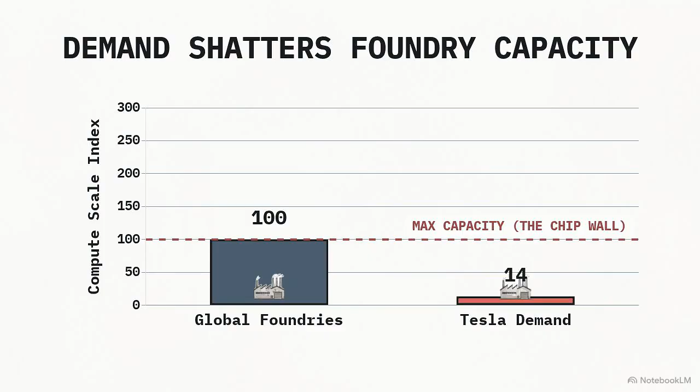Internal forecasting models revealed a strict physical limitation, known as the chip wall. This is a projected macroeconomic reality where the combined maximum output of the world's leading semiconductor foundries, primarily TSMC and Samsung, will be mathematically insufficient to meet Tesla's scaling requirements.

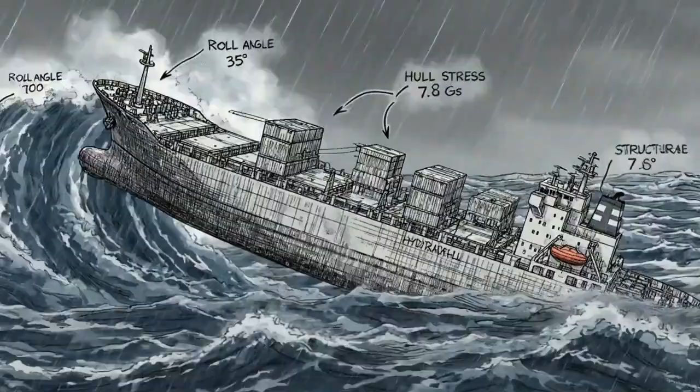Relying on those foundries also introduces severe geographic and geopolitical liabilities. Building the intelligence architecture for a massive fleet of autonomous vehicles and robots on a highly concentrated, fragile supply chain located entirely across the Pacific Ocean presents an unacceptable corporate risk.

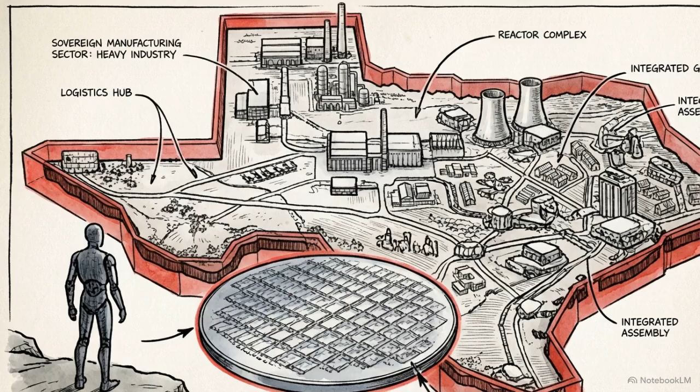To survive the AI race and secure its physical robotics rollout, Tesla concluded it must transition from a fabless automotive client into a sovereign integrated device manufacturer. By domesticating the hardest manufacturing process in human history, Tesla aims to design, fabricate, and package its own silicon entirely in-house. Tesla initially attempted to bypass the impending chip wall through a traditional partnership.

They signed a $16.5 billion supply contract with Samsung Electronics to manufacture the critical upcoming AI6 processor. Early in 2026, that strategy failed.

Samsung's highly anticipated 2-nanometer prototype run suffered a catastrophic schedule slip, delaying production by roughly 6 months. This acute delay rippled through Tesla's corporate roadmap, pushing the critical AI6 mass production deep into late 2027 or 2028. It exposed the existential threat of outsourcing hardware development for embodied AI.

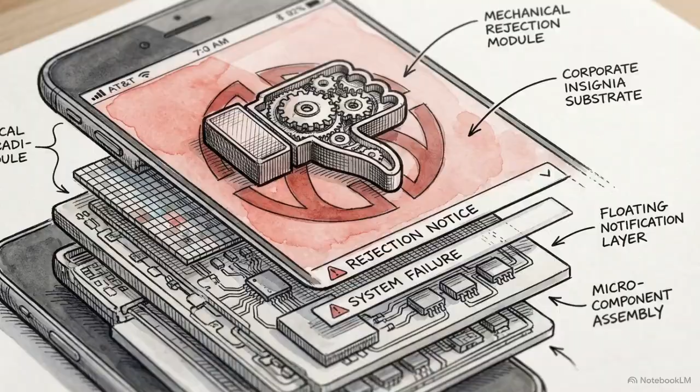Rather than accept the delay, Elon Musk made a ruthless pivot. He effectively fired his exclusive external partners and posted a 7-word announcement, declaring the launch of a domestic TeraFab initiative in exactly 7 days. Tesla is targeting an initial capacity of 100,000 WSPM, with a long-term goal of 1 million.

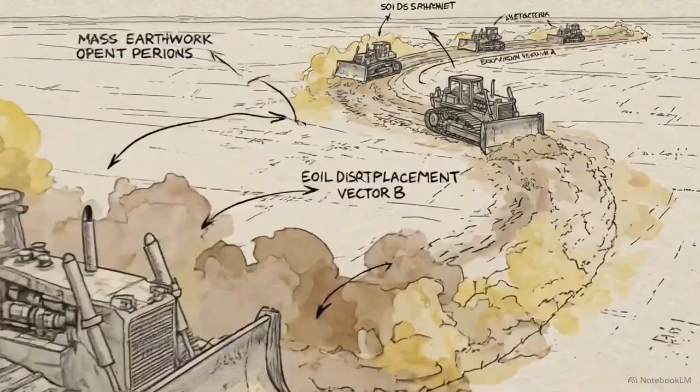WSPM stands for wafer starts per month, the standard metric for a factory's total output. Reaching 1 million WSPM would mean replicating roughly 70% of TSMC's total global output inside a single domestic footprint. Building an industrial empire of that magnitude within a single Texas footprint represents an aggressive, high-risk declaration of total silicon independence.

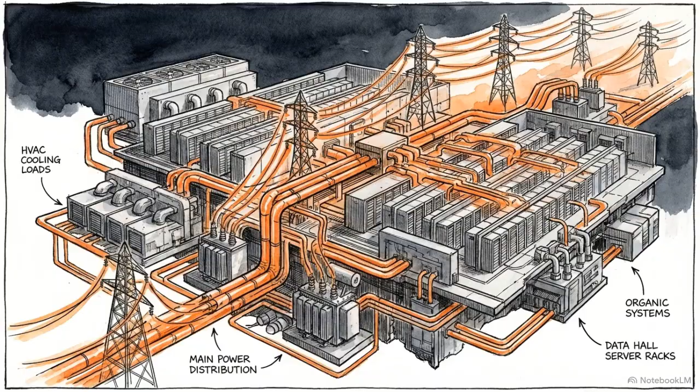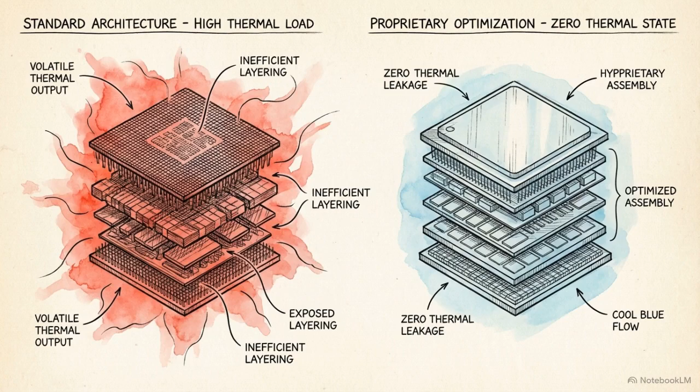The global build-out of AI infrastructure is severely constrained by raw electrical grid capacity. An NVIDIA H100 processor famously draws up to 700 watts of power. Tesla designed its custom AI architectures to achieve equivalent computational performance at a hyper-optimized 150 watts.

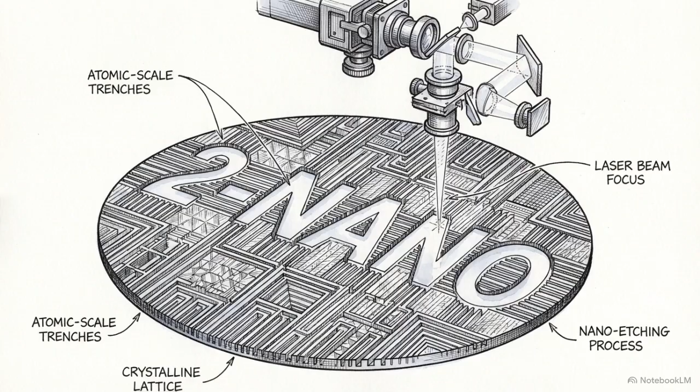Achieving that extreme 150-watt efficiency strictly dictates manufacturing at the bleeding-edge 2-nanometer process node. Traditional architectures fail at the 2-nanometer scale due to quantum tunneling. Electrical current leaks through solid matter, generating heat.

The 2-nanometer process solves this with a gate-all-around architecture. Wrapping the gate completely around the silicon channel locks electrons in place, preventing thermal leakage.

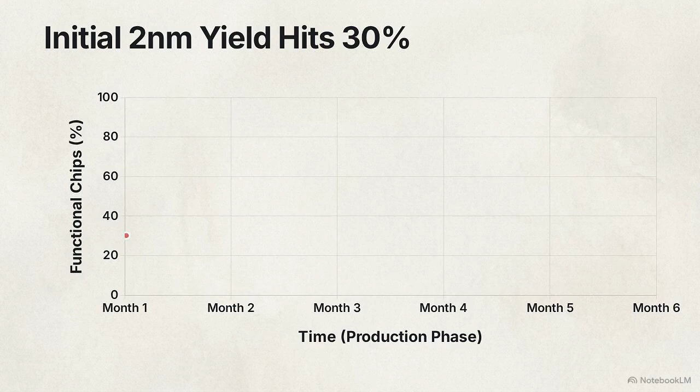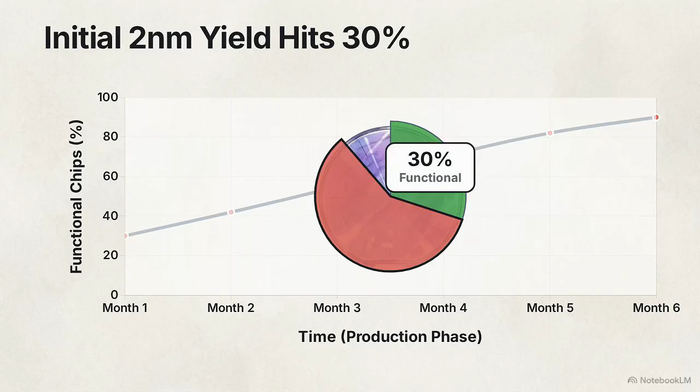Moving from nanometer physics to factory economics requires understanding yield curves. A yield curve measures the percentage of functional, usable chips produced on a single silicon wafer versus those scrapped due to microscopic defects. Early production runs at advanced nodes like GAA are notoriously volatile.

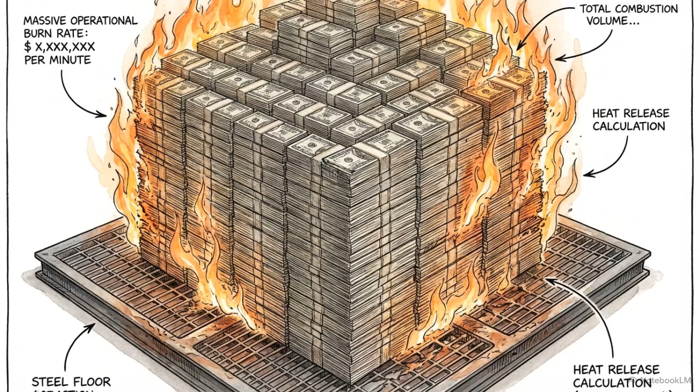Initial attempts frequently produce catastrophic yield rates, sometimes resulting as few as 30% usable dies per wafer. The true cost of the TeraFab is not the $25 billion construction budget, it is the tens of billions of dollars in operational cash burn required to agonizingly tune that 2-nanometer yield curve from 30% up to a profitable 90%.

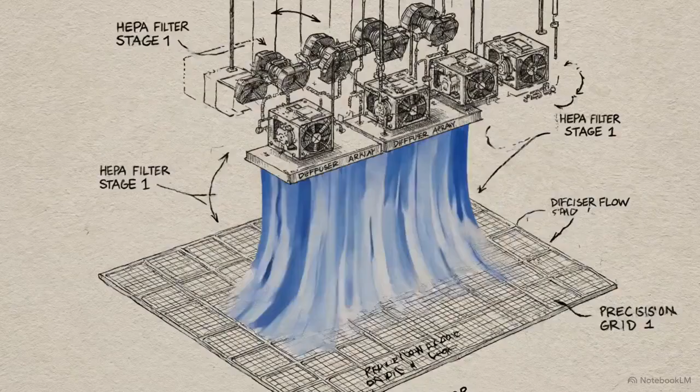For decades, the bedrock of semiconductor yield management has been the ISO Class 1 cleanroom. These massive, energy-intensive environments utilize heavy HVAC infrastructure to filter out almost every microscopic particle from the ambient factory air.

Musk polarized the industry by proposing to discard these traditional cleanrooms entirely. He publicly wagered that he could eat a cheeseburger and smoke a cigar directly on the 2-nanometer factory floor without ruining the silicon. His technical argument relies on wafer isolation theory.

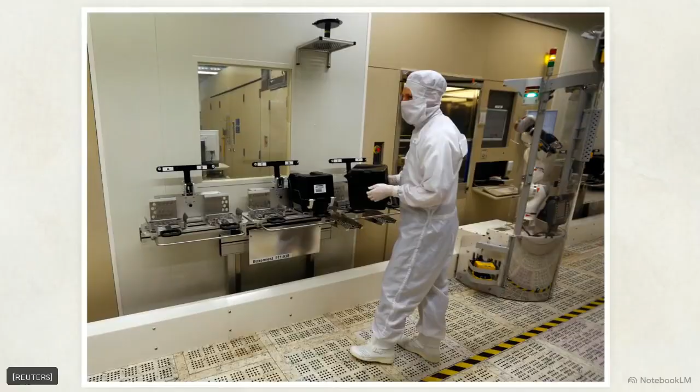He proposes keeping the product inside FOUPs, or front-opening unified pods, which are sealed boxes filled with pure nitrogen gas, conceptually identical to how agricultural commodities are protected in controlled oxygen-free atmospheres during global shipping.

Process engineers immediately identified the fatal engineering conflation in this theory. Successfully isolating the silicon wafer does absolutely nothing to protect the incredibly sensitive manufacturing equipment from the macro environment.

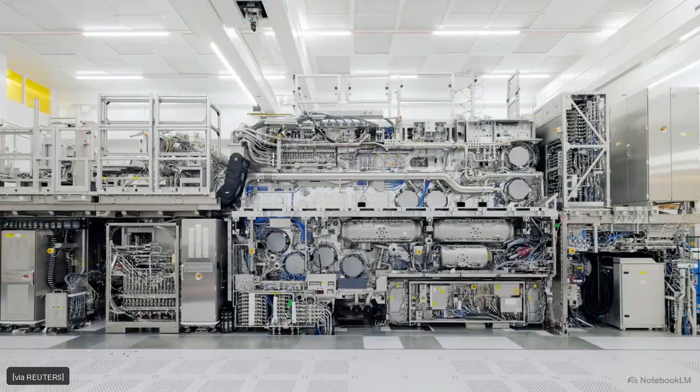Printing at 2 nanometers relies exclusively on EUV, or extreme ultraviolet lithography. This technology generates a 13.5 nanometer wavelength of light by bombarding microscopic tin droplets with high-power lasers tens of thousands of times per second inside a vacuum. To direct that specific wavelength of light onto the silicon, EUV technology utilizes ultra-sensitive optical mirrors.

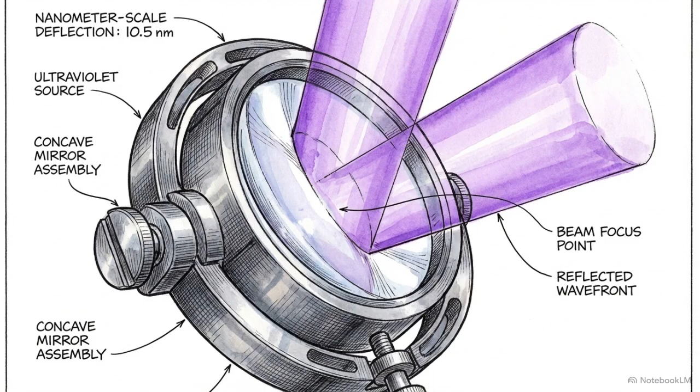Cheeseburger grease and cigar smoke generate massive amounts of volatile organic compounds. Even if the wafer is safe inside its nitrogen box, the ambient factory air will inevitably interact with the lithography optics during routine machine maintenance or reticle loading.

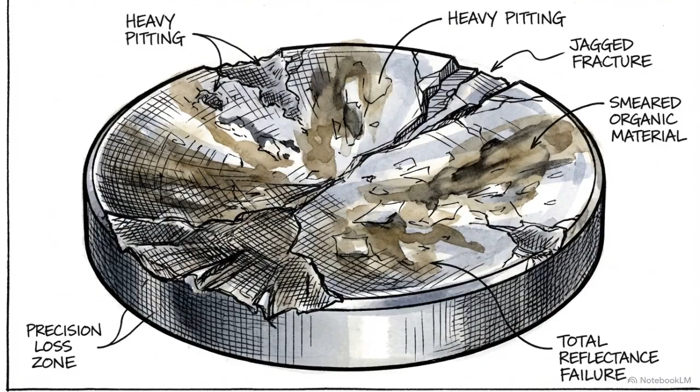Contaminating a $200 million optical mirror with these compounds permanently destroys the tool's precision. If the mirror cannot focus the light perfectly, the factory's production yield drops to absolute zero instantly. Treating an atomic-scale manufacturing facility like an agricultural logistics problem invites catastrophic, fab-wide equipment failure.

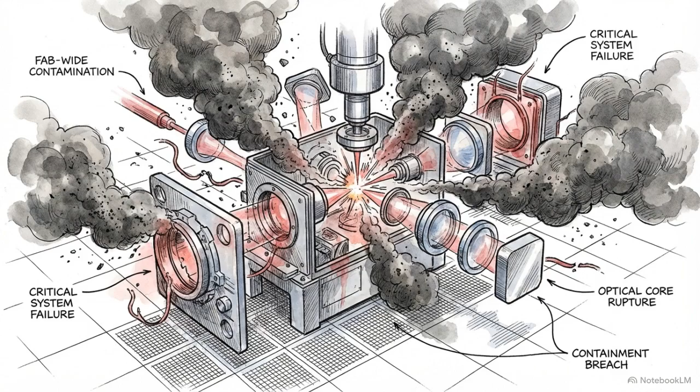The current global semiconductor supply chain is deeply fragmented. Distinct companies handle logic printing in Taiwan, memory fabrication in South Korea, and final packaging in scattered facilities across Asia. Shipping sensitive components across the ocean creates massive data latency and bottlenecks at OSAT facilities. OSAT providers package these disparate chips together.

The TeraFab blueprint disrupts this standard by combining logic, memory, and packaging entirely under one domestic roof. The new AI6 architecture strictly demands this unified packaging approach. By moving silicon directly from logic printing to memory integration in a continuous domestic pipeline, the physical distance data has to travel is minimized. This architectural requirement is directly tied to the end use case.

An Optimus robot operating in the physical world must process high-definition, real-time video instantly, without any lag, to function safely. The TeraFab initiative physically re-architects the supply chain to unlock the zero-latency processing speeds required for physical robotics.

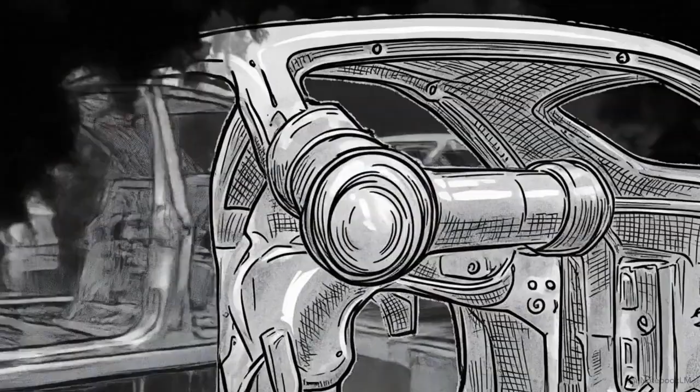This financial pivot is a definitive burn-the-ship strategy. To execute it, Tesla took extreme internal measures, physically halting legacy Model S and X production lines in Fremont just to clear factory floor space for Optimus assembly.

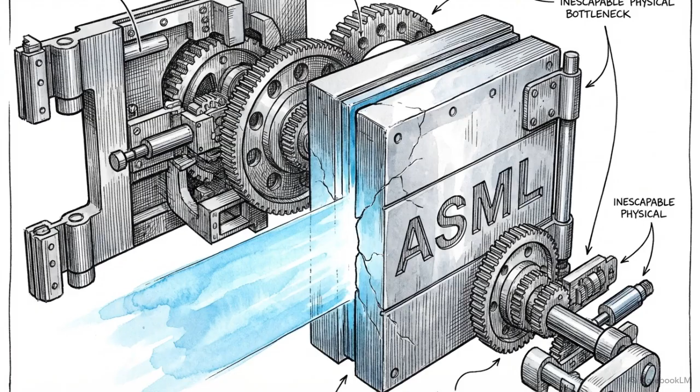But even with infinite capital and massive floor space, there is a final, inescapable physical bottleneck: the Dutch firm ASML. ASML holds an absolute global monopoly on extreme ultraviolet lithography machines. They are the only company on Earth that manufactures the tools capable of printing at the 2 nanometer node.

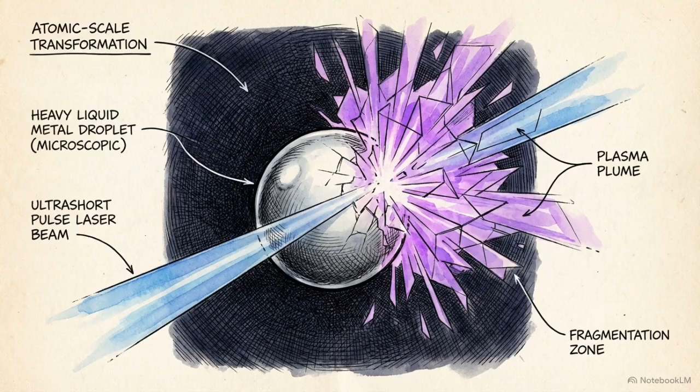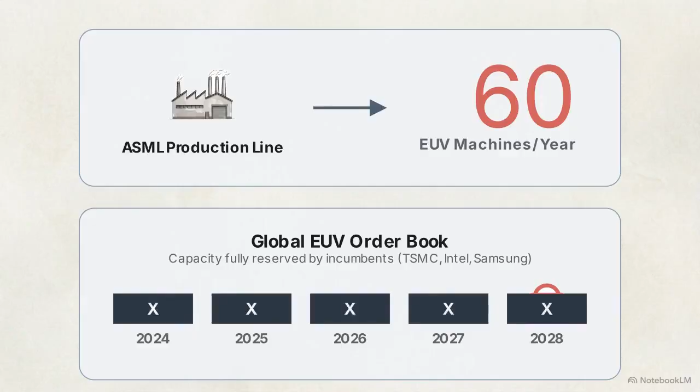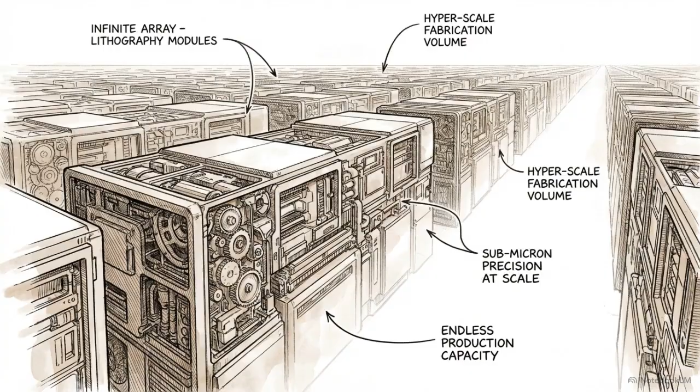ASML can only produce roughly 60 of these incredibly complex tools annually, and their entire production capacity is backlogged and spoken for through 2028. The companies monopolizing that order book, TSMC, Intel, and Samsung, are the exact competitors Tesla is attempting to bypass. A facility targeting 1 million wafer starts per month requires hundreds of EUV machines.

Without securing priority allocation of those back-ordered tools, the TeraFab is physically incapable of scaling, regardless of how large the building in Texas is. If the execution is precise, Musk creates a new model for vertical integration, transforming Tesla into a sovereign AI infrastructure state immune to supply shocks.

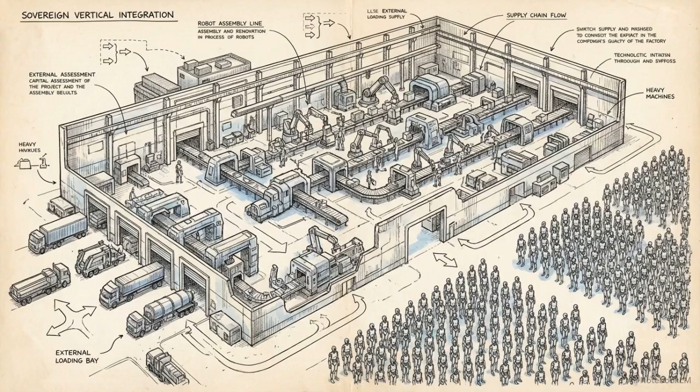If the yield physics, contamination risks, or equipment bottlenecks are miscalculated, the TeraFab becomes a $25 billion monument to capital destruction.